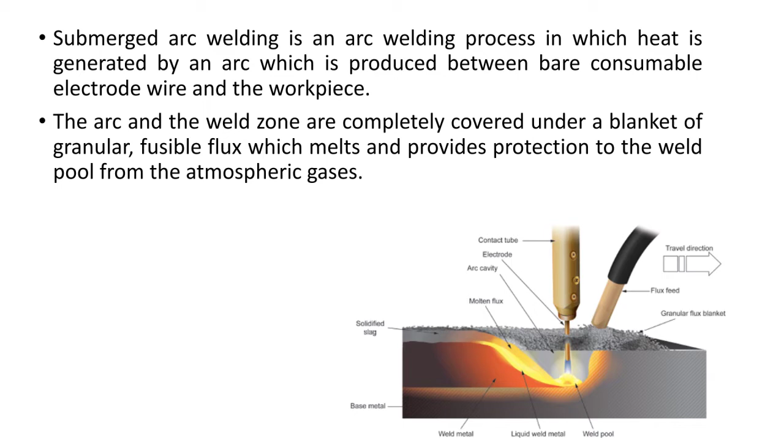Now this arc is completely covered with the help of granular fusible flux, and this flux provides protection from the atmosphere to this arc. So here you can see this is the electrode, this is a pipe through which we supply the flux, this is solidified slag, this is the base metal, this is liquid metal pool, and this is the weld pool.

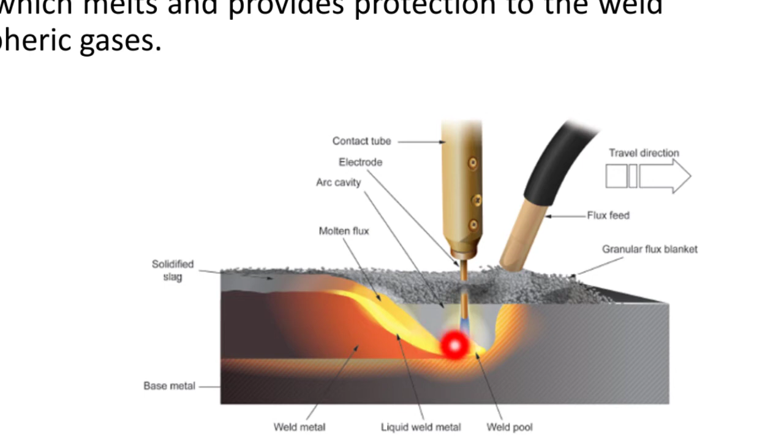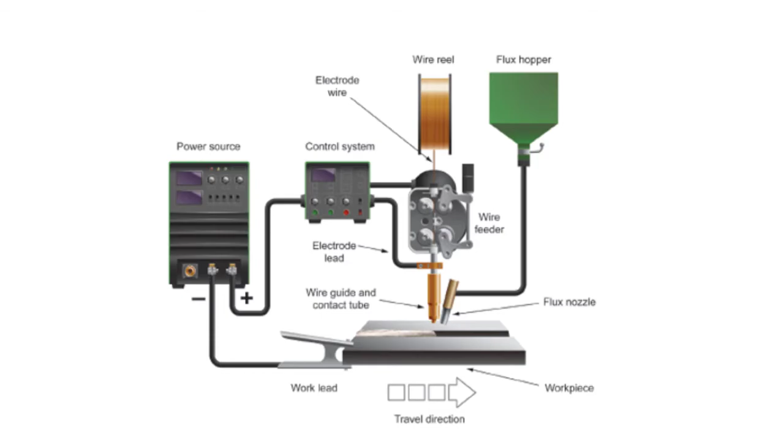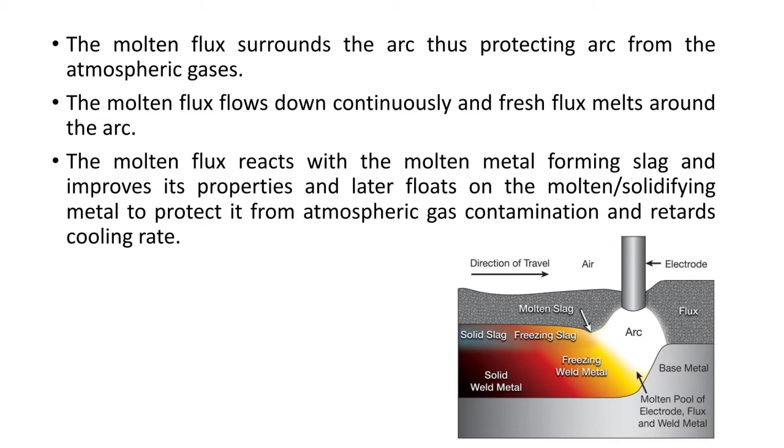Now the molten flux surrounds the arc, thus protecting it from atmospheric gases. Here you can see the arc generated between the bare electrode and workpiece, completely surrounded by this flux, which protects the weld bead from the atmosphere. The molten flux flows down continuously and fresh flux melts around the arc. The molten flux reacts with the molten metal, forming a slag, improves its property, and later floats on the molten or solidifying metal to protect it from atmospheric gas contamination and retard cooling rate.

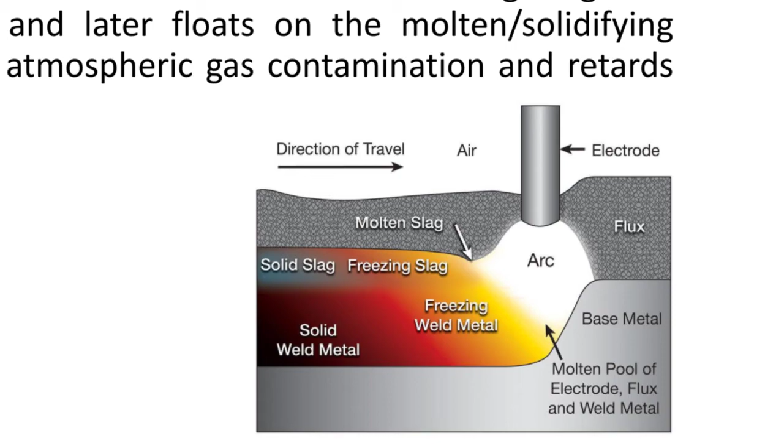So here, whatever flux we are giving to this process, some part of the flux reacts with the molten metal and becomes part of your weld bead, while the remaining part becomes slag.

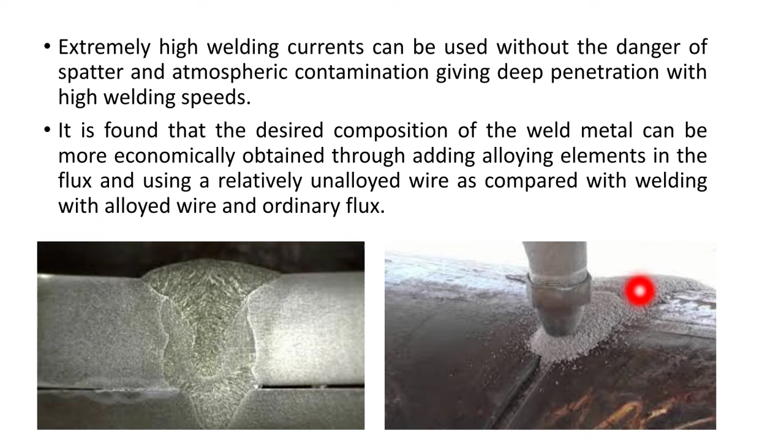It is found that the desired composition of the weld metal can be more economically obtained by adding alloying elements in the flux and using a relatively unalloyed wire, as compared with welding with alloyed wire and ordinary flux. So we can supply the alloying elements through the electrode, or we can supply the alloying elements through this flux. Through research, it is found that supplying the alloying element through the flux is very economical.

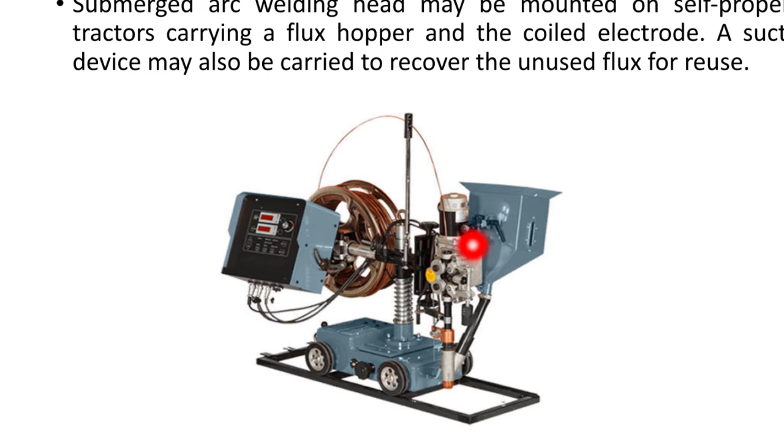Now the submerged arc welding head may be mounted on a self-propelled tractor carrying a flux hopper and the coiled electrode. A suction device may also be carried to recover the unused flux for reuse. Here you can see it can be mounted over a tractor. This is the hopper where you can store the flux, supplied through the flux nozzle, and this is the electrode in form of wire, mounted over the machine, continuously supplied with the wire feeder mechanism.

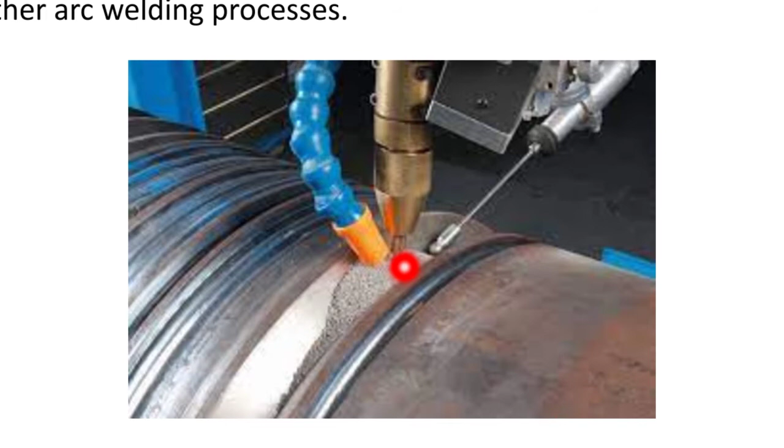Since the end of the electrode and the welding zone are completely covered at all times during the actual welding operation, the weld is made without spark, spatter, smoke or flash continuously observed in other arc welding processes. So here you can see the arc is completely submerged inside the flux. So there will be no spark, spatter, smoke or flash.

Electrode wire and fluxes are two major consumables in this process. Wire of structural steel is coated with copper to protect it from atmospheric corrosion, and it also increases its current carrying capacity.

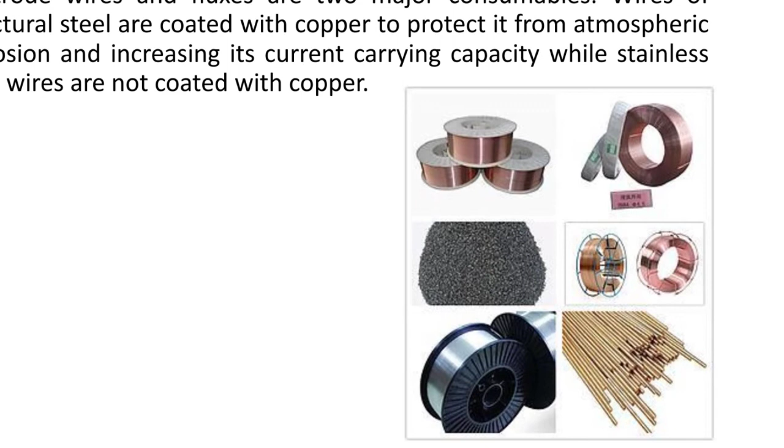While the stainless steel wire is not coated with copper because it contains chromium as its main constituent, which protects it from corrosion.

Flux in submerged arc welding performs more or less the similar function as the electrode coating in manual metal arc welding, except for the generation of shielding gases. In SMAW, the electrode is coated with flux that disintegrates while welding and forms shielding gases that protect the weld bead from the atmosphere. Here also the flux protects the weld bead from the atmosphere, but it does not produce any shielding gases.

However, this flux performs the additional function of pickup or loss of alloying element. This flux provides additional alloying elements, since sometimes there is a loss of alloying element through gas metal or slag metal reaction.

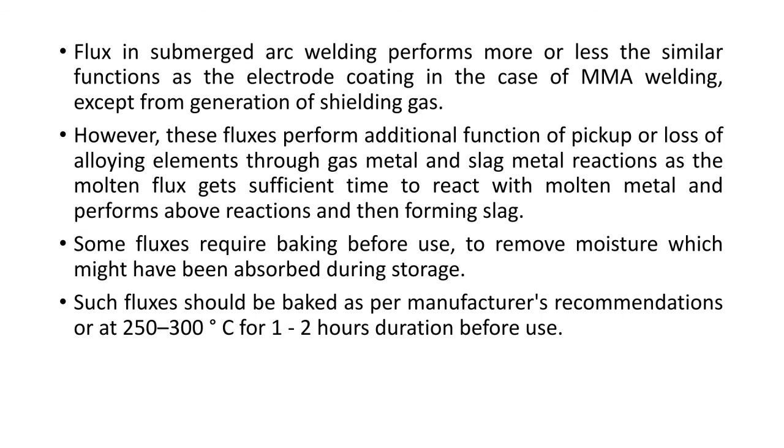Some fluxes require baking before use to remove moisture which might have been absorbed during storage. We have to bake it at a temperature of about 250 to 300 degrees Celsius for 1 to 2 hours, or it can be baked by following the manufacturer recommendations.

The electrode wire size, welding voltage, current and speed are the most important welding variables apart from the flux. We can use wire from say 0.5 mm to 5 or 6 mm. So electrode wire size is one parameter, and then welding voltage, welding current and welding speed. These are the 4 most important parameters in this process.

Welding current is the most influential variable as it controls the electrode melting rate, depth of penetration, and the amount of base metal fused, making it one of the most important of these 4 parameters.

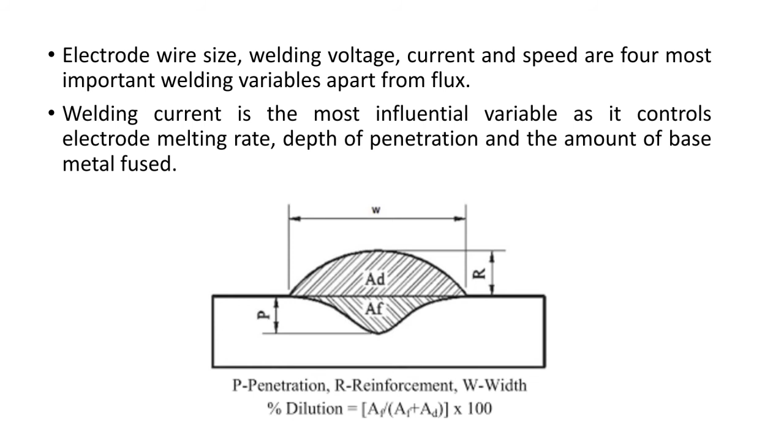Here you can see the penetration is denoted by P, and this is the reinforcement. If you want to calculate the percent dilution, that is nothing but AF divided by AD plus AF, into 100. That gives you percent dilution.

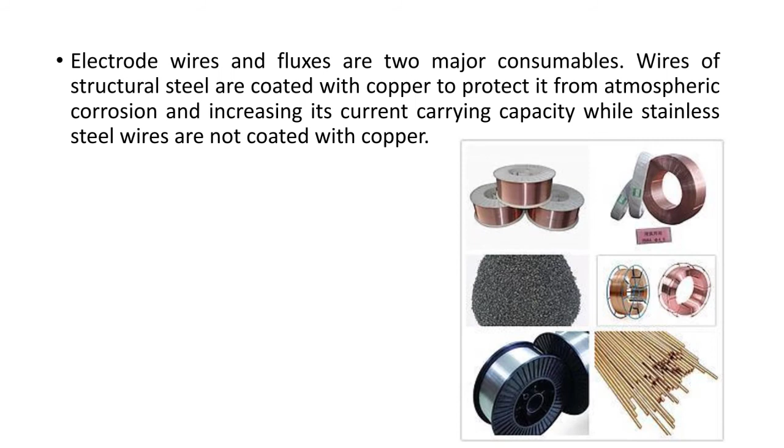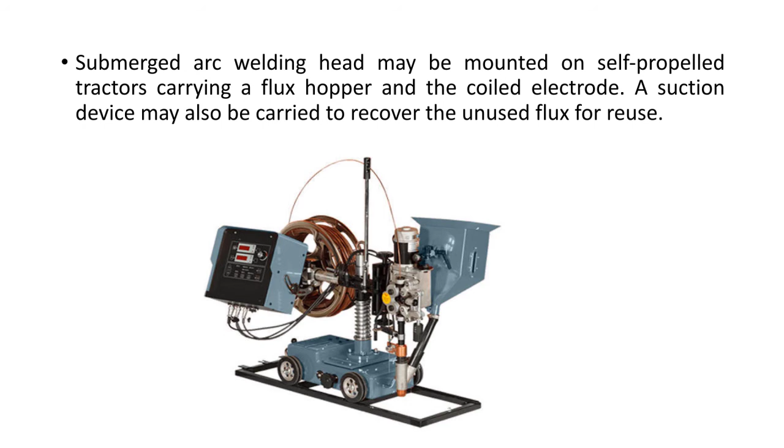Submerged arc welding has a high deposition rate with high depth of penetration. This is a continuous welding process with no interruption, as the electrode wire is supplied through a coil on a spool. The welding wire is available in form of a coil attached to the machine as a spool, and it is continuously supplied through the feeding mechanism, making it a continuous process.

Welding is carried out without spark, smoke and spatter. The weld bead is very clean and smooth. Welds produced are of high quality with good mechanical and metallurgical characteristics.

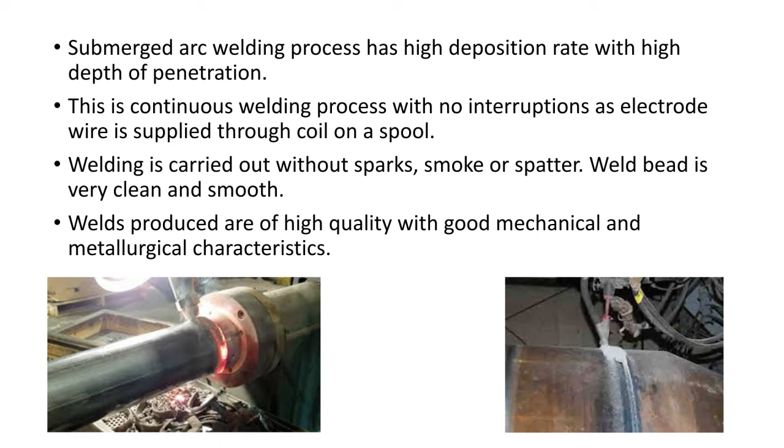As the arc is not visible, being covered with a layer of flux, it necessitates accurate guidance of the welding head on the weld groove, failing which improper fusion will result. You cannot see the arc between the electrode and workpiece because it is completely submerged inside the flux. That is why it is very important to control the parameters, otherwise there will be improper fusion.

Circumferential welds cannot be made on small diameter components because the flux falls away. Here you can see this pipe has a very large diameter. If we are welding a pipe with small diameter, the flux falls away.

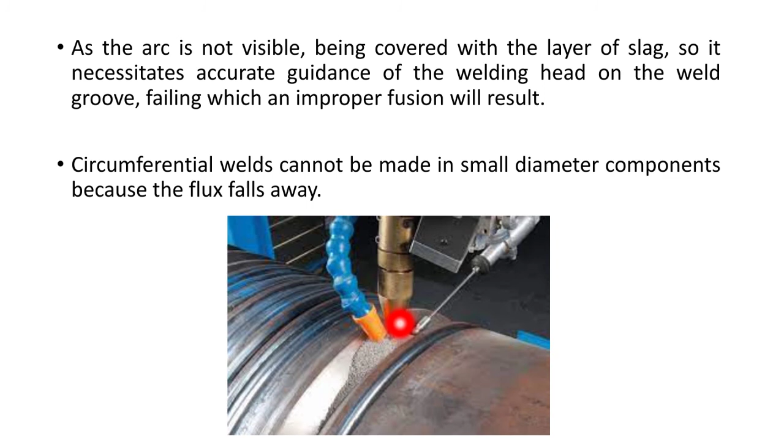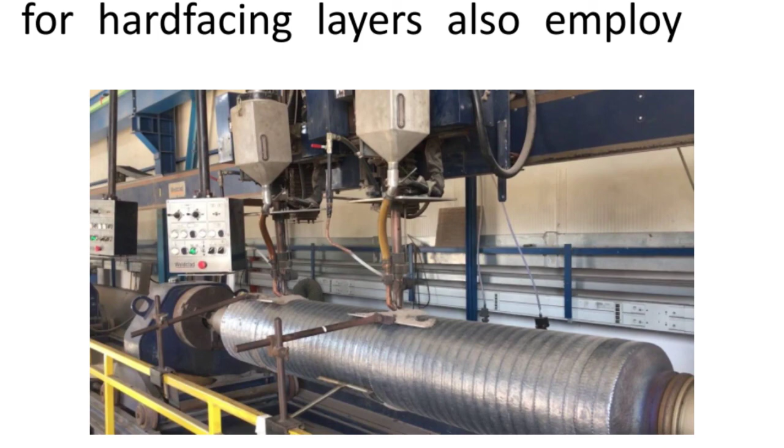This is nothing but the process of cladding. Whenever you want to improve the properties of the surface, cladding is done, meaning we are depositing metal over the surface of a component through the process of welding. That is known as cladding.

So these are some of the applications of the submerged arc welding process.